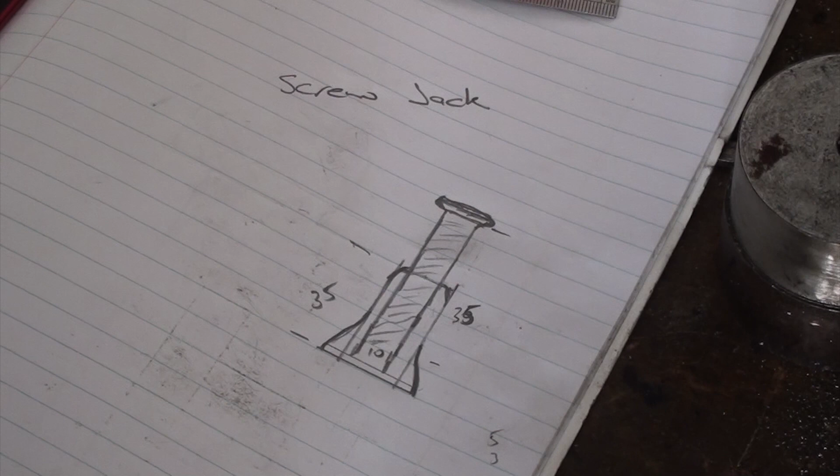I need another project to do, so I've decided I'll make a screw jack. This is nowhere near to scale at all, just a rough drawing of sort of what I had pictured in my head. I did make this one up quite some time ago, it's just I needed one in a hurry, and that's the best I come up with.

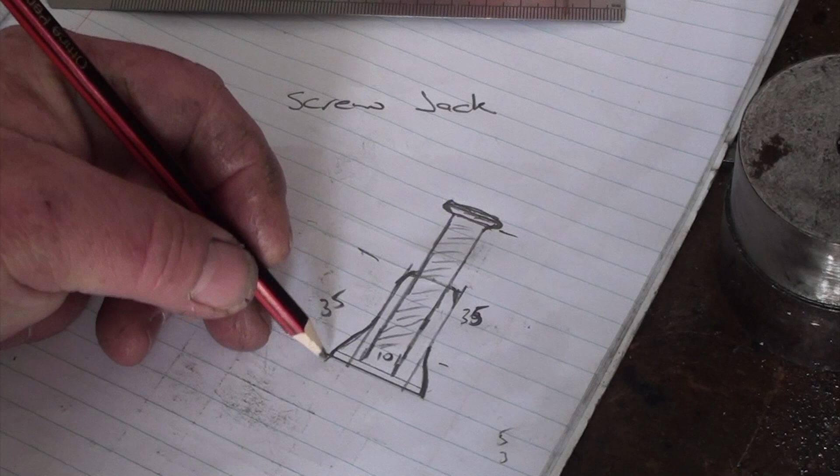And yeah, quick, and it works. But I want to make a smaller one, and I can put stacker blocks underneath it and make up little other bits I can just fit underneath there as well. I don't know how I'm going to go at the top here, whether I can make it so the top will spin free.

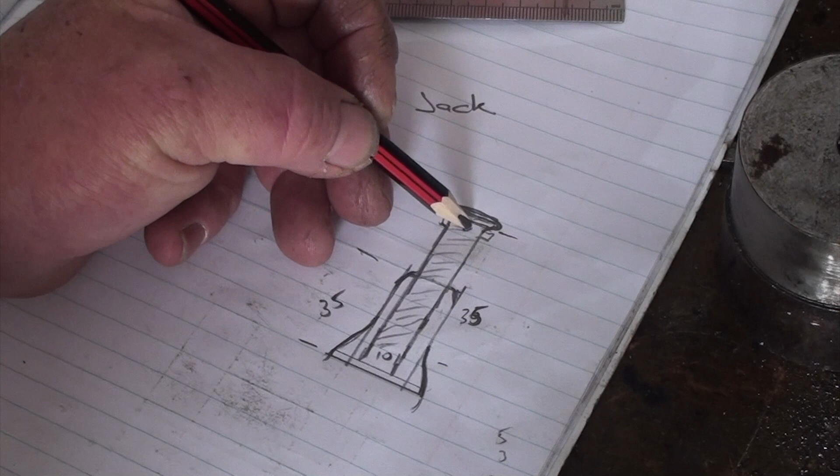I'm thinking about on the shaper, using a shaper to make a section at the top here square, and like the Starrett ones have, they just have the hole in there that you can use for a turn and jacking it up. So I want to use the shaper a bit too on this project, not just the lathe.

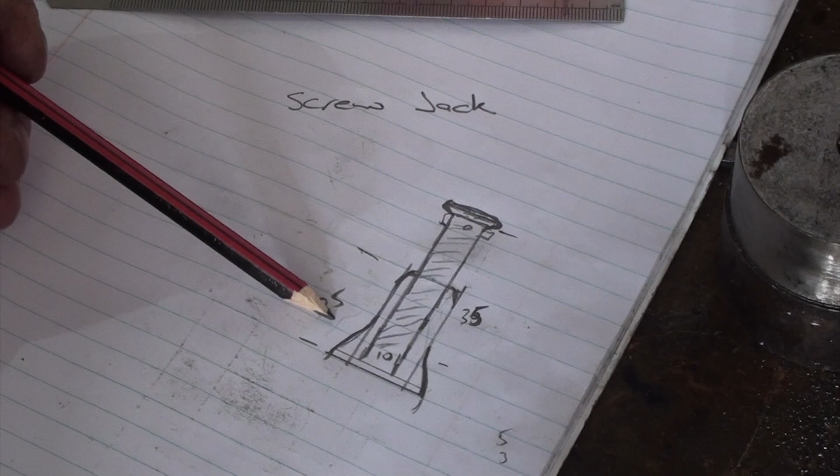So I've got some shaft there. I'm going to cut a piece off and I'll make the main body. I think at this stage it's going to be nothing special, but it'll do the job.

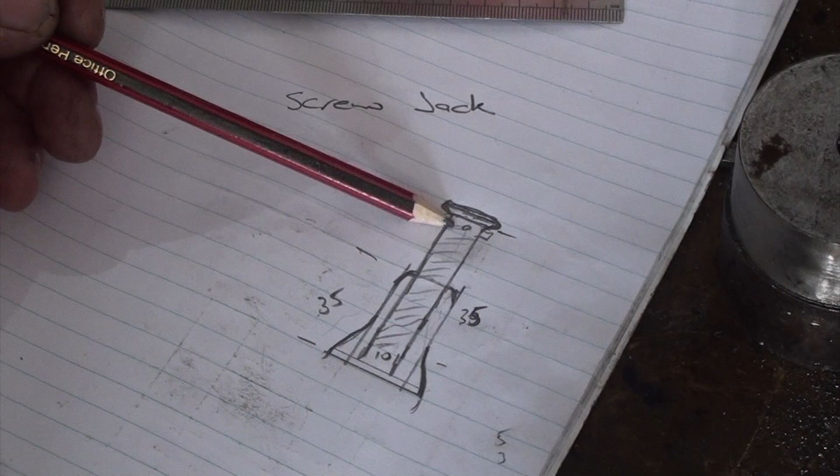Probably go with a 10mm thread. I'll just make a thread run a die up at this stage, and put a square on the top, make a round bit, and I'll just make it as I go and see how it all turns out.

Okay, I'll get some material ready and I'll bring you back when I finally get myself all sorted out.

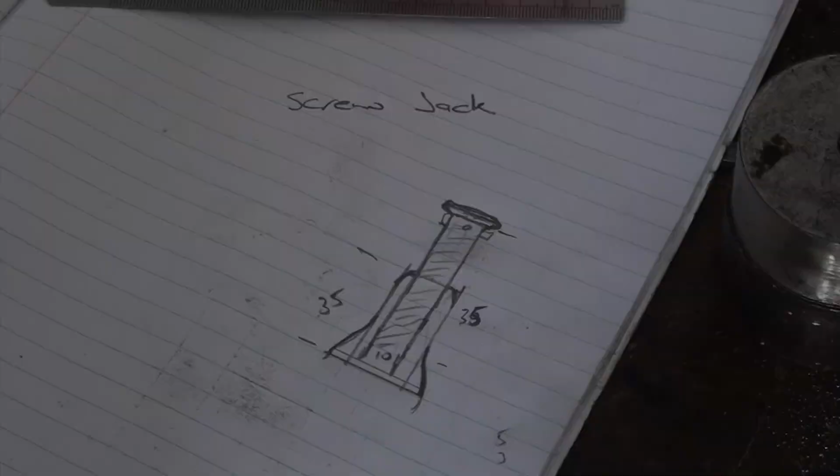Alright, see you when you get home.

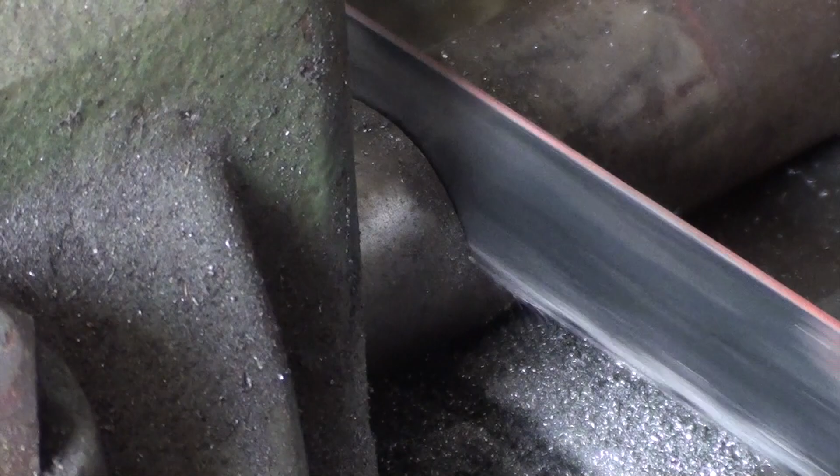Okay, I got it set up in the lathe here. I cut a piece of shaft off. Piece of shaft I decided to use was a bit of 30mm. I've roughly just faced one end off. I'm going to centre drill it. I'll shift it out in the chuck then I run a live centre, and I'll start shaping the outside. So I'll get started.

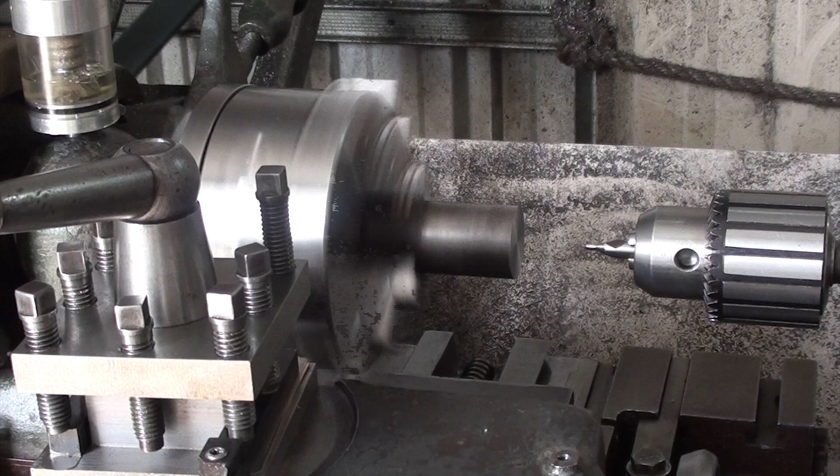And that'd be typical, I didn't do it up in the chuck. Bad habit of that.

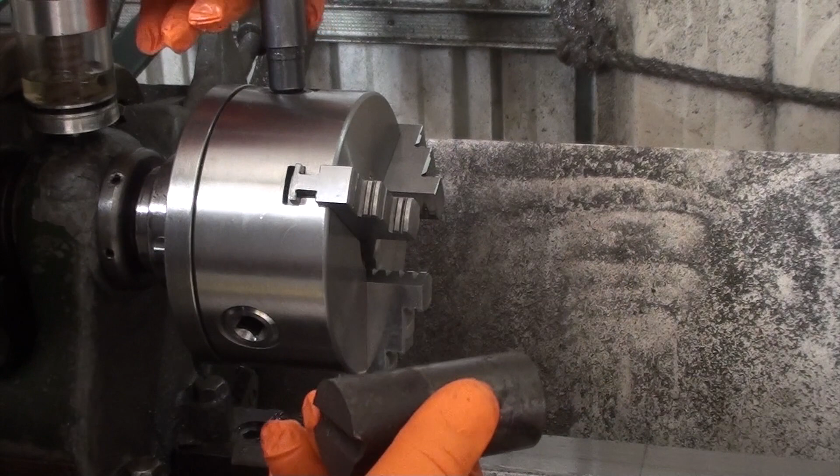Shift it out now. It's only a little slug, it's not all that big at all, really. Gave me a little dainty little jack, I think.

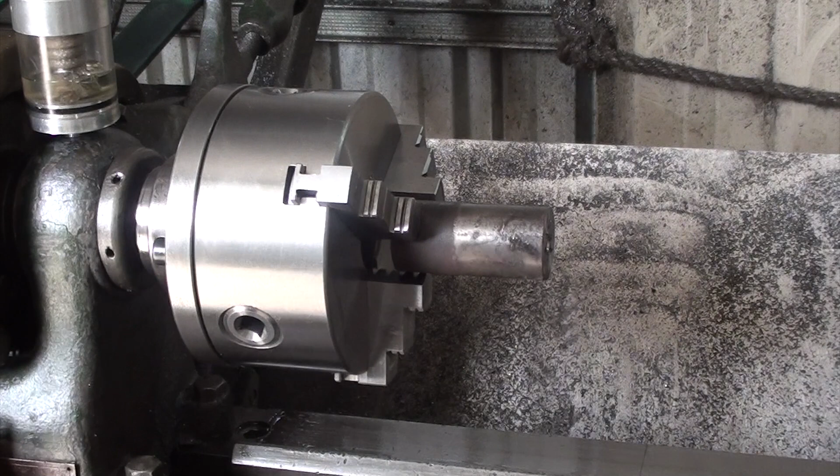Just find me rule. So yeah, hanging out 2 inches. I'll just tuck it in a touch more. Sorry, I'm trying to work around the camera and everything, it's only a little shed, not much room. A touch more length.

Okay, the quill's all tightened up. I'll reposition the camera and start making some cuts.

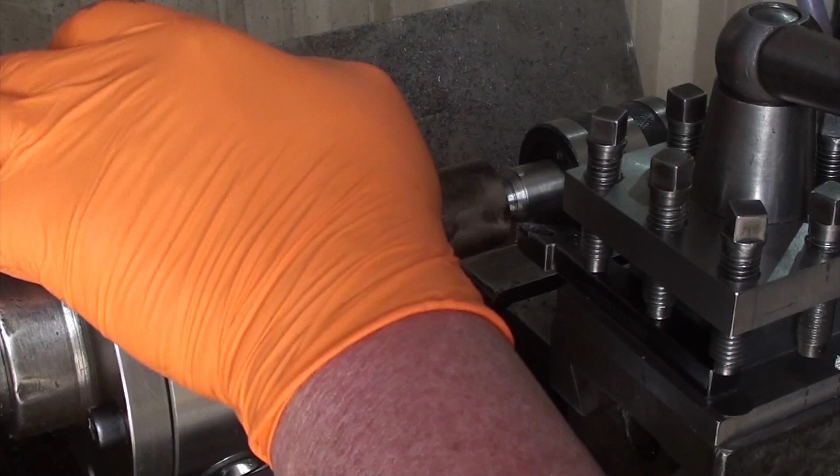Rightio, I've got it running as good as I can get it in this 3 jaw. It's measuring about 31.5 mil. I'm going to take it down to 30 mil, no reason, it'll clean up the outside, that's about the only reason I'll do that for. So I'm not real going to be crucial on the sizes, it's just whatever it turns out to be really. It's one of them little fun projects where you just make it as you go, and that's the way I like to do all mine. So I'll make a start.

I'm not too sure what type of material it is, but it seems pretty soft really. I might spin the lathe up, might be a bit noisy on the change gears, but it'll handle it. It's not too bad, considering.

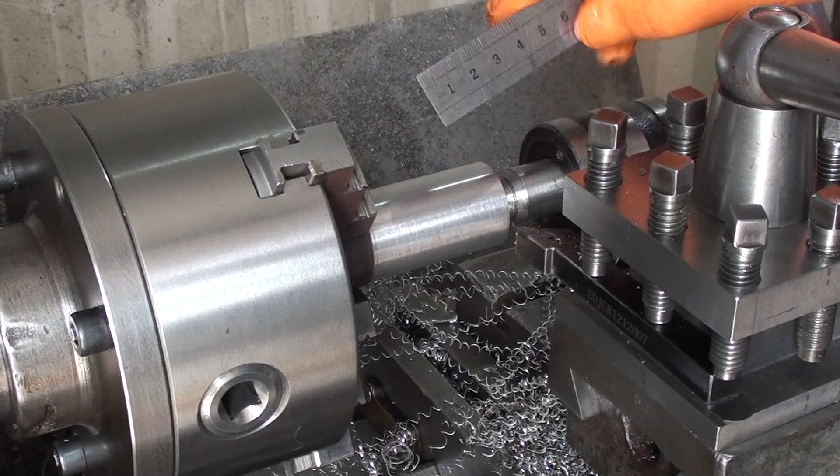29.75. Good enough. Righto, I think I will come in, might put about a 10mm base on it, then I'll taper it in and then cut it down the length there. So come in 10mm. Roughly is good enough. I'll put a witness mark there.

There we go. Just have to do a little skim along there to clean that edge up, because it don't clash anywhere. I'll be right. Just get a bit hairy there and that'll be close. Don't think that's going to hit anywhere. No, that'll be right.

Might actually knurl a section in here while I'm at it. I think there's no real reason why I can't.

Ah, bugger it, I'll do it that way. I'll set the knurling tool up. Oh yeah, the knurling tool's in place. I know the camera angle's not real good there, but I do apologise, it's the best I can do with what I got. And yeah, cutting oil, some on the bottom wheel, get in there. Okay.

Hard on it. Caught a few bristles in my brush. Gave my brush a fairly good haircut then. Oh dear, that was a silly thing to do, wasn't it? Get out of there, Mr. Burry Hair.

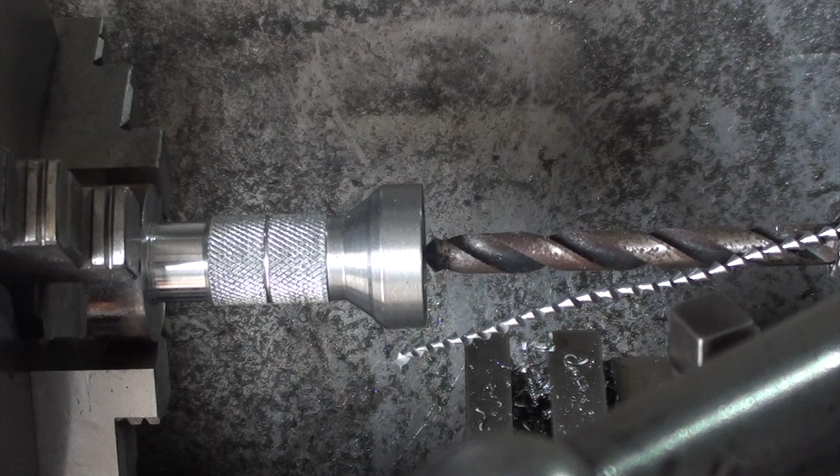In this video I've sorted out a letter Q drill for a 3/8 24, that's what I decided to go with. So I found a drill that's very close to a letter Q, it's only about... what size is it? 21/64ths. So I'm going to run with that and see how it goes.

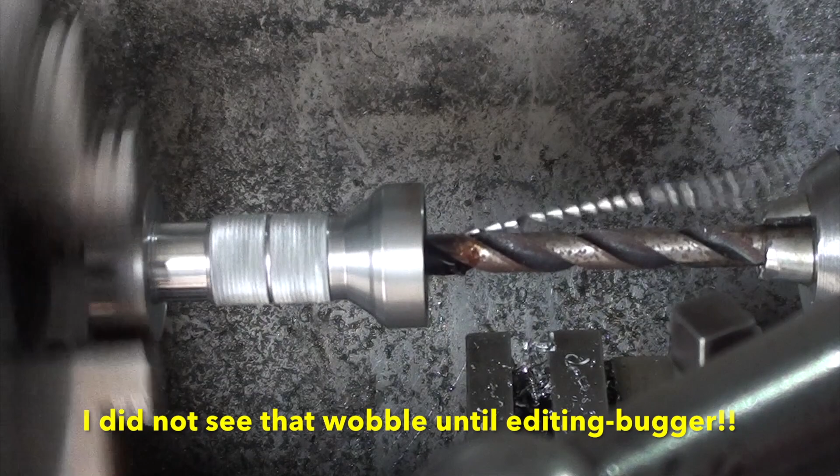I did start the drill off before I started filming it, just to make sure it was going to cut alright. It's just an old drill I found, so give it a bit of a lick and a promise on the grinder, and it seems to be cutting okay. It's one-sided, but oh well, that's the way it goes.

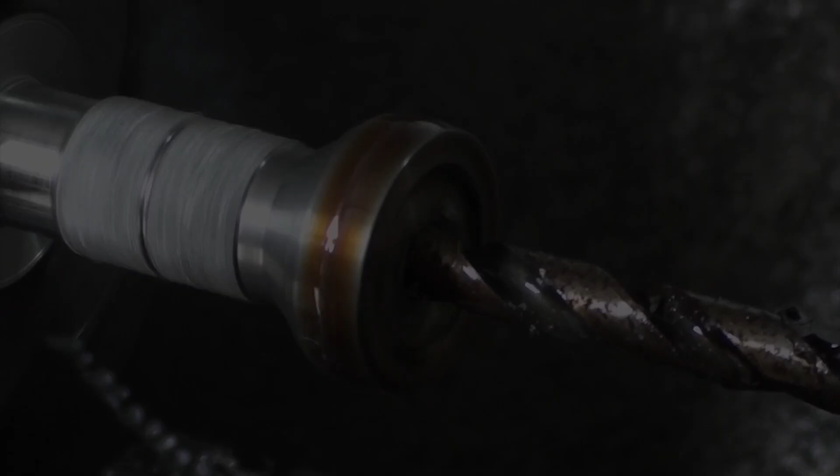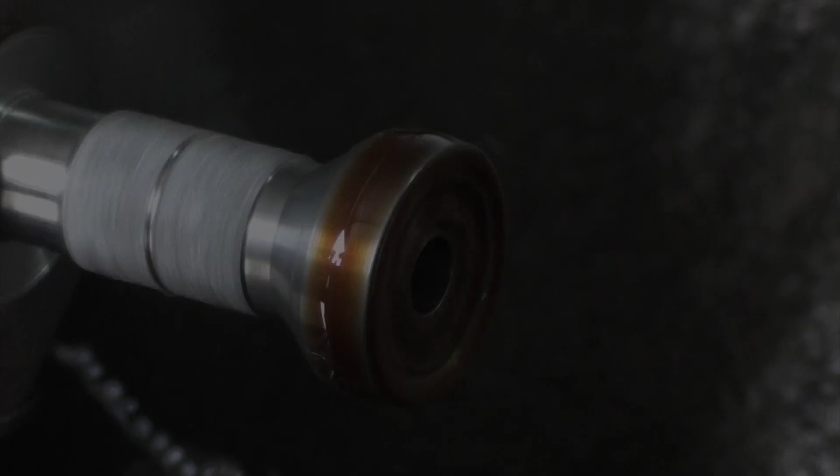Bloody wonderful. Happy days.

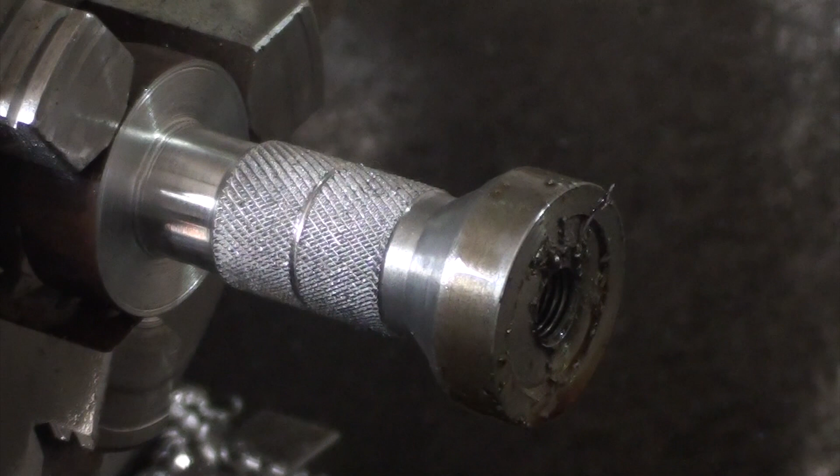Okay, I might start the thread on that now, I think. I'll run the thread in it and then... nearly right. Okay, you can see there I've got a few threads started. I've started, but I can't keep the bloody tap tight in the drill chuck, which, yeah, probably the wrong way to be doing it.

So I'm gonna, before I part this end off, put that in the vise and just run the thread down while, yeah, and I'll use that to clamp on in the vise and cut it off. Okay, I'm over here on the bench.

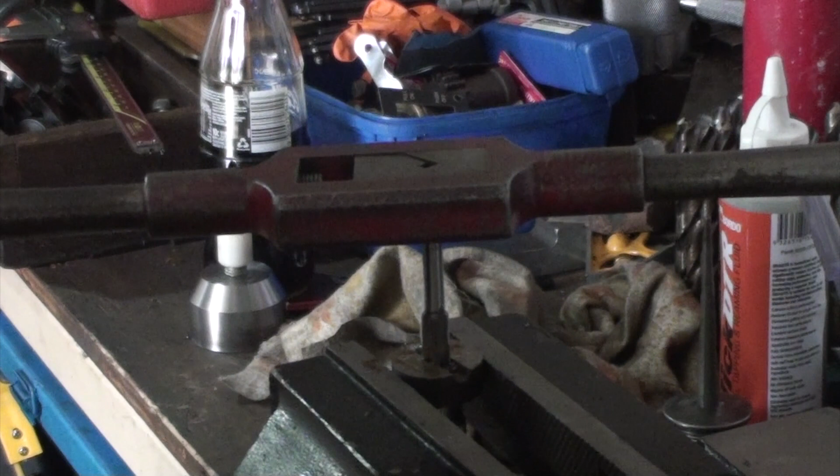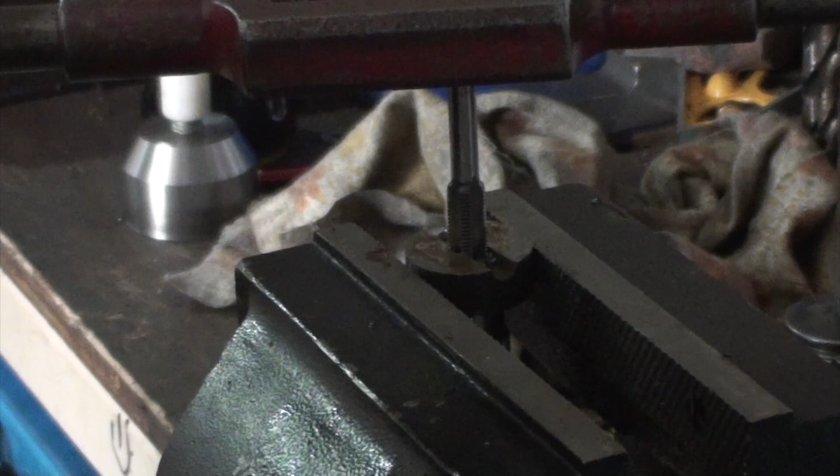Leave me down there a touch. I've got it jammed in the vise, and I know I'm tapping down through the piece I've got to cut off, but just give me somewhere to hold in the vise so I don't mar up any of the other piece. Yeah, I started tapping it through. I enlarged the bottom of the hole so I don't have to tap all the way.

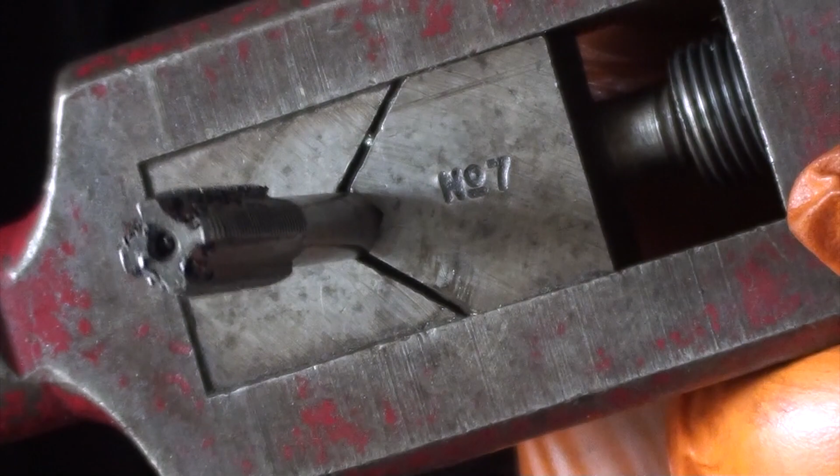This tap holder, P&N number 7, this is one I borrowed off Dad many years ago. So if you're looking for it, Pop, you know where it is. Still working alright too, haven't broke it.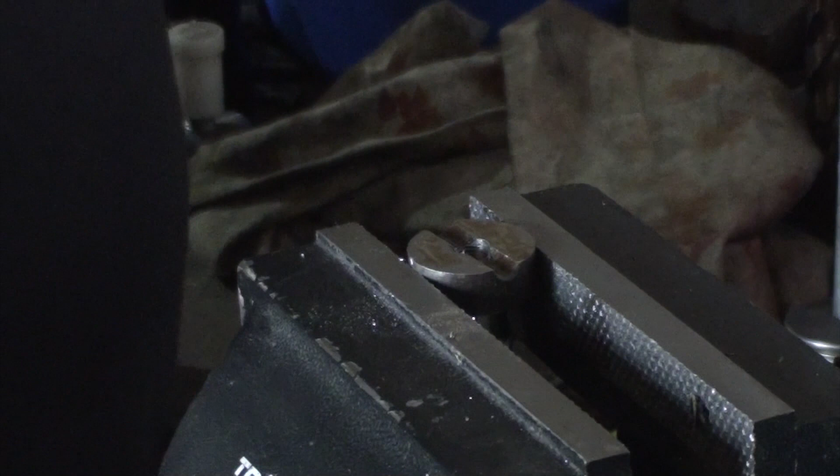Okay, I think we're done there. Ooh, bloody hell, it's hot. Okay, oh Jesus, that's bloody hot.

Okay, I'll now take it back out of the lathe and part it off. And we'll be right. Right-o, I've parted it off. I apologise I didn't get the footage of that.

What I'm going to do is just clean the end up, probably on the belt sander. I don't want to chuck it back up on that knurl or on that end shoulder. Yeah, and I'm just going to run the tap back down and just clean that thread up off the top there. So bring you back in a moment.

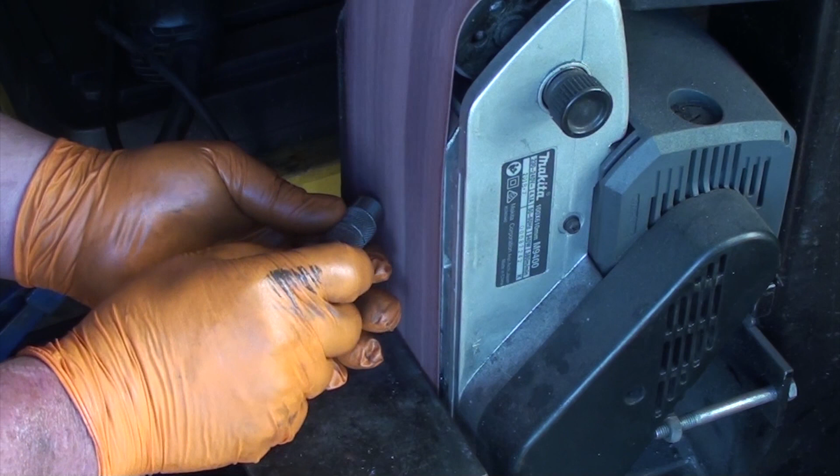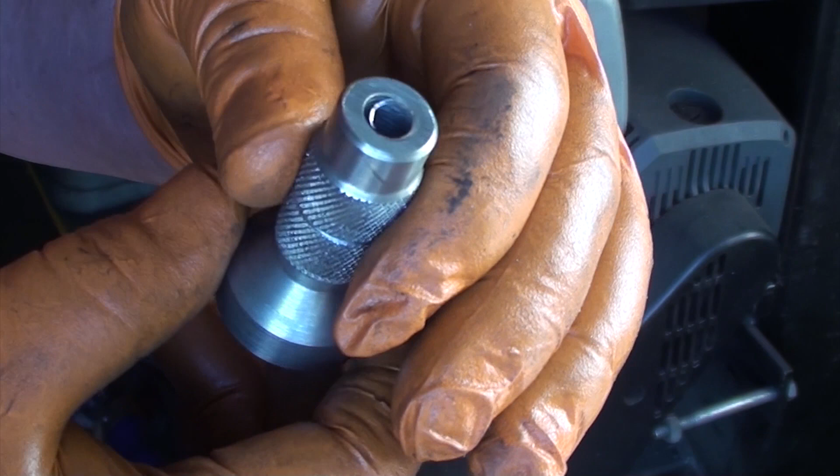There we go. Run the tap down there now and get rid of that burr. It's good as finished, that piece.

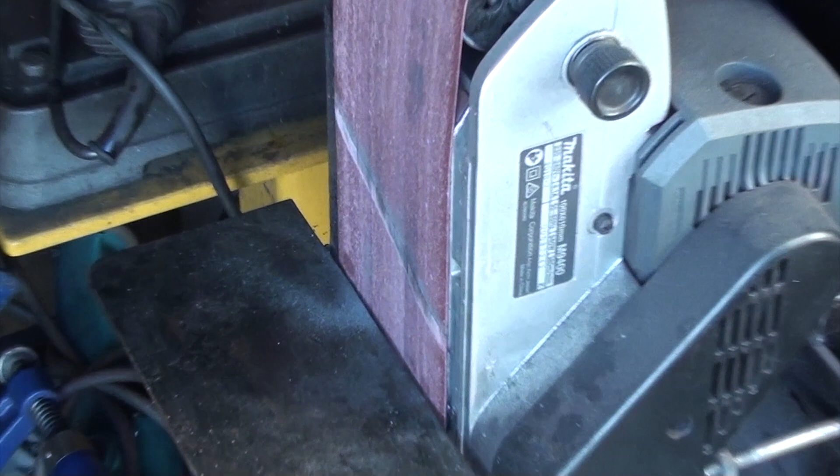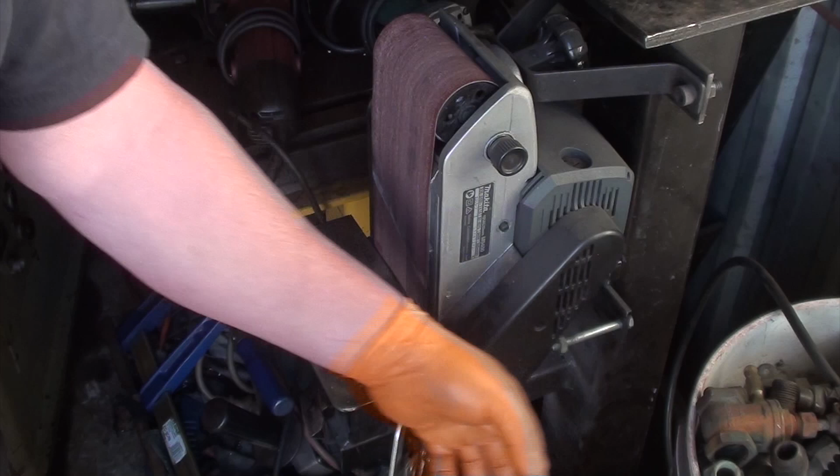Not a bad idea, that belt sander. It's just a Makita belt sander, it came with this bracket here in the kit when you buy it. Well, this one did anyway. So I made it so the holes mount through where the trigger is and lock the trigger on, and built a little table off it. It's amazing how much you actually do on it. For a cheap sander, nasty and wild, it works really good. So there you go.

All I have to do is just run the die down by hand, if I can get it started again. Yeah, just run it down by hand. And yeah, went simple.